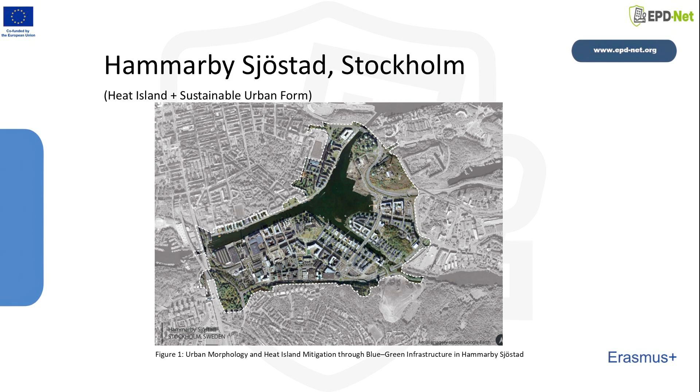The incorporation of green areas and water management systems serves to reduce surface temperatures and enhance ecological connectivity across the district. These morphological elements not only improve environmental quality but also bolster the resilience of the city in the face of climatic challenges, demonstrating a holistic approach to urban planning and climate adaptation.

Green buffer zones, rain gardens, and permeable surfaces are integrated along the street sections, enabling stormwater to be collected, filtered, and gradually infiltrated into the blue-green infrastructure network rather than being rapidly drained through conventional systems. Tree-lined streets and vegetated edges provide shading and evapotranspiration, which significantly lowers surface and ambient temperatures during warm periods and mitigates urban heat stress.

The pedestrian-oriented design not only enhances thermal comfort but also supports social interaction and everyday usability of public space. Through these spatial strategies, street sections function simultaneously as mobility corridors, microclimate regulators, and ecological systems, demonstrating how climate-responsive street design can strengthen urban resilience while improving environmental quality and livability.

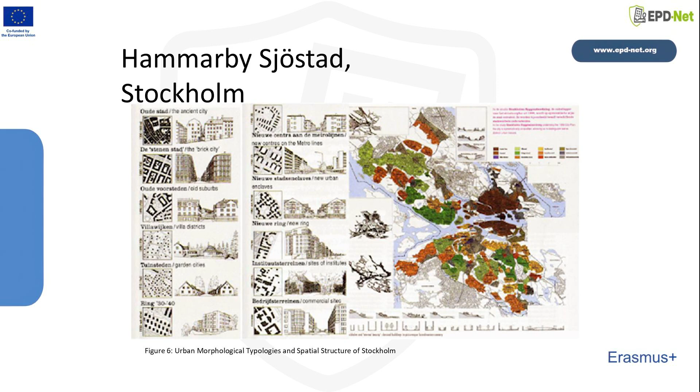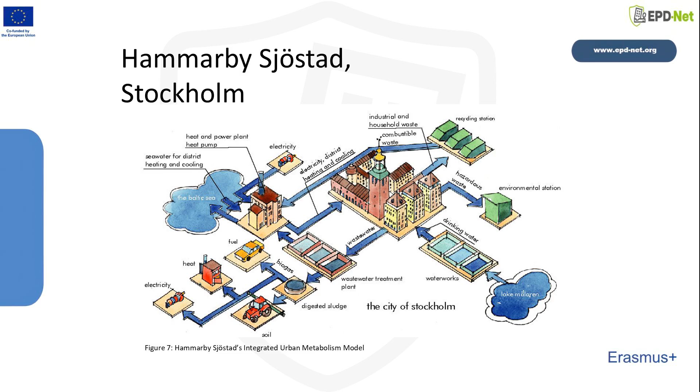This integrated approach shows that urban resilience is not achieved solely through physical form, but through the synchronization of morphological decisions with environmental infrastructure. The compact yet permeable urban structure supports efficient service distribution, while blue-green infrastructure enhances stormwater management and microclimatic regulation. By embedding ecological cycles directly into the urban fabric, Hammarby-Sjöstad exemplifies how sustainable urban form can simultaneously reduce environmental impacts, enhance climate adaptation capacity, and improve long-term urban resilience.

Medellín is located in a narrow valley surrounded by steep slopes, resulting in an urban morphology that is strongly shaped by topography. The concentration of settlements on hillsides increases exposure to landslides, erosion, and rainfall-related risks. In response, the city has developed a resilience-oriented urban form that integrates green corridors, topography-adaptive mobility systems, and slope stabilization strategies. Through the Green Corridors Program, 2016 to 2019, urban streets, riverbanks, hillside paths, and public transport axes were connected via 30 linear ecological spines, forming a continuous environmental network across the city.

These corridors aim to reduce urban heat stress, manage stormwater more effectively, and enhance soil stability on slopes. By aligning urban development with natural landform constraints rather than overriding them, Medellín demonstrates how topography-responsive planning can transform environmental vulnerability into a structural component of urban resilience and climate adaptation.

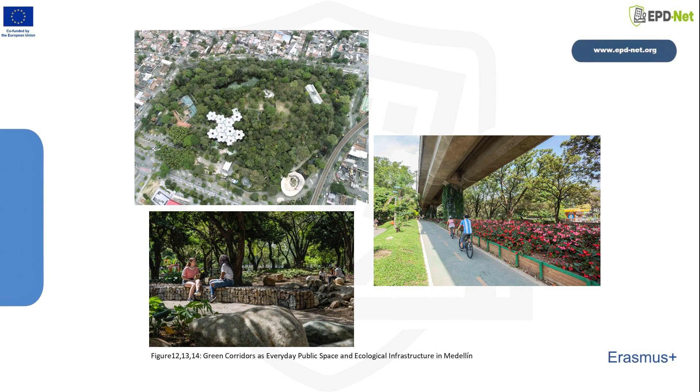This integrated approach demonstrates that ecological infrastructure in Medellin functions not only as an environmental enhancement, but also as a strategic urban tool for disaster risk reduction and climate adaptation.

The Tokyo case demonstrates how open space morphology was strategically reconfigured to address earthquake and fire risks within an extremely dense urban fabric. Following the 1923 Kanto earthquake, large-scale parks and wide boulevards were deliberately planned as firebreak corridors to prevent the rapid spread of post-earthquake fires.

In areas characterized by narrow streets and dense wooden housing, the urban fabric was restructured through the introduction of linear open spaces that fragmented high-risk zones and improved emergency access. These open areas also functioned as evacuation and assembly spaces, providing safe gathering points during disasters.

Importantly, the system was conceived as a connected open space network, linking parks, corridors, and public spaces into a continuous morphological structure rather than isolated elements. This planning approach marked a turning point in Tokyo's urban reconstruction, establishing open space not only as a social amenity but as a critical component of disaster-resilient urban form.

As another case, the Copenhagen Cloudburst Management Plan demonstrates how urban morphology can be strategically reconfigured as a flood-adaptive spatial system in response to increasing pluvial flood risks. Rather than treating stormwater management as a purely technical infrastructure issue, the plan reframes the urban fabric itself as an active component of water governance.

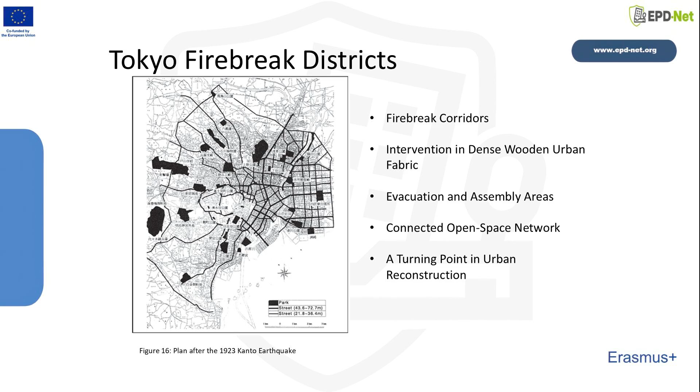While these spaces operate as conventional public realms under normal conditions, they temporarily assume the role of blue corridors during cloudburst events. This layered functionality exemplifies a robust form of morphological adaptation, in which everyday urban life and flood-resilient infrastructure are integrated within a single spatial framework.

Copenhagen Cloudburst Management Plan demonstrates how urban morphology can be strategically redesigned to manage extreme rainfall events. Rather than treating flooding as a purely technical problem, the plan integrates streets, parks, and open spaces into a connected water management system. Street sections are reshaped to guide excess rainwater safely through the city, while low-lying parks and green corridors function as temporary retention and storage areas during cloudburst events.

Permeable surfaces, biofiltration elements, and controlled surface gradients increase infiltration and delay runoff. Under normal conditions, these spaces operate as everyday public realms. During heavy rainfall, they transform into functional flood infrastructure. This approach highlights a holistic, morphology-based adaptation strategy where urban form actively contributes to climate resilience.

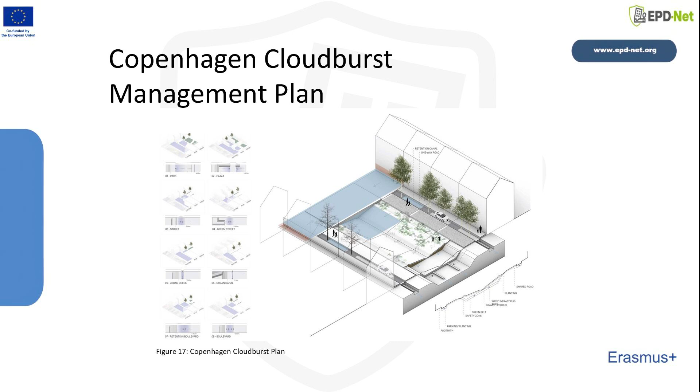Copenhagen Cloudburst Management Plan represents a resilient urban design approach developed to address flash floods caused by intense rainfall events. Instead of relying solely on underground drainage infrastructure, the plan restructures urban morphology to manage water on the surface. Streets, parks, and open spaces are redesigned to function as controlled flow paths and temporary retention areas during extreme rain events. Under normal conditions, these spaces operate as everyday public realms. During cloudbursts, they safely convey and store excess stormwater.

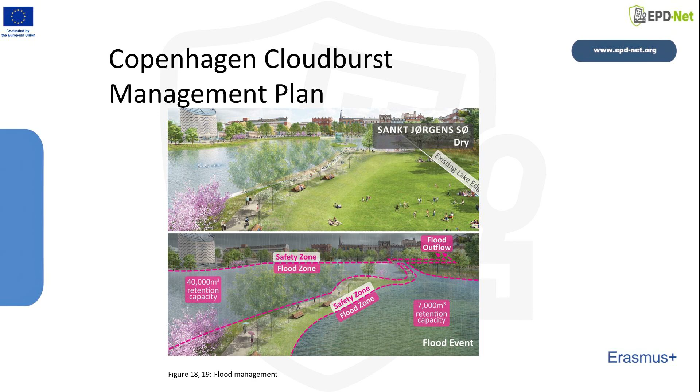This integrated system distributes water loads across the urban fabric, reduces pressure on drainage networks, and minimizes flood damage. The Copenhagen case demonstrates how urban form itself can act as a climate-adaptive infrastructure, enhancing resilience without compromising daily urban life.

Copenhagen Cloudburst Management Plan demonstrates how urban morphology can actively function as a flood-responsive system under extreme rainfall conditions. In this approach, street sections are reconfigured to guide stormwater along predefined flood routes rather than resisting it. Variations in street width, elevation differences, curb design, and surface materials are carefully calibrated to control water flow direction and speed. During normal conditions, these streets operate as everyday public spaces.

During cloudburst events, they temporarily transform into safe water corridors. Permeable surfaces, low-lying green areas, and blue-green infrastructure elements are integrated to slow, store, and redirect excess water. This model illustrates how urban form itself can become a proactive risk reduction tool, enhancing resilience while maintaining daily urban functionality.

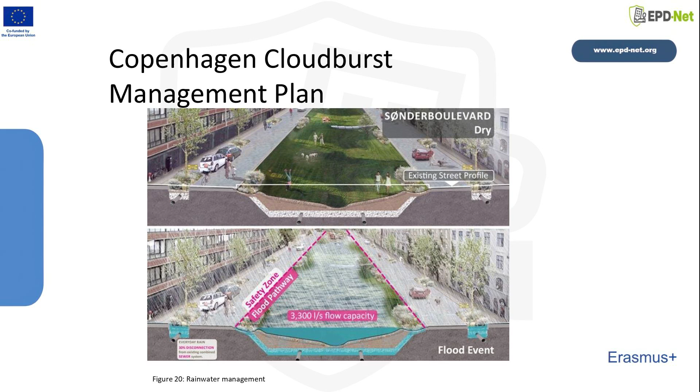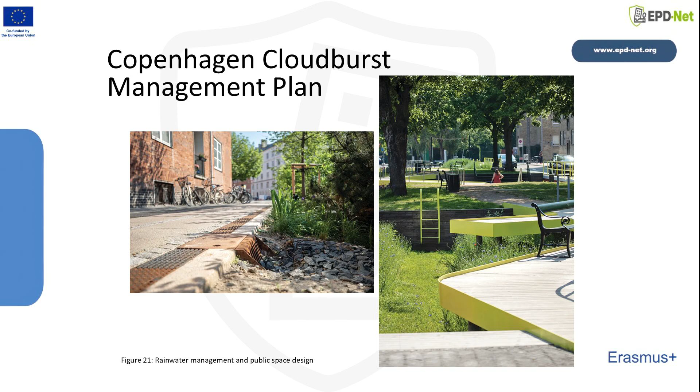This example illustrates how rainwater management is integrated with urban space design within the Copenhagen Cloudburst Management Plan. Street sections and public spaces are reconfigured to guide and temporarily store stormwater during extreme rainfall events. Under normal conditions, these areas function as everyday public spaces, while during cloudburst events they transform into safe water corridors, demonstrating how urban morphology can operate as an effective risk reduction tool. By combining blue-green infrastructure with adaptive street design, the plan enhances urban resilience while preserving the usability and quality of public space.

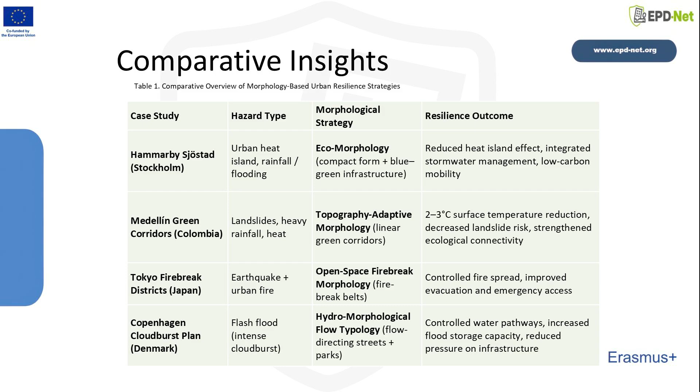As illustrated in the table, each case addresses a distinct hazard context by mobilizing urban morphology as a key resilience mechanism. Hammarby-Sjöstad integrates compact urban form with blue-green infrastructure to reduce heat stress and manage flooding. Medellin employs topography-adaptive green corridors to mitigate landslide risk and improve microclimatic conditions. Tokyo utilizes open-space firebreak morphology to control post-earthquake fire spread, while Copenhagen restructures streets and parks as flow-directing systems to manage cloudburst-induced flooding. Collectively, these cases demonstrate the critical role of urban form in hazard mitigation and adaptive urban resilience.

This presentation highlights how urban morphology plays a critical role in shaping cities' exposure and resilience to multiple hazards, including heatwaves, flooding, landslides, and post-earthquake fires. The case studies demonstrate that spatial strategies such as blue-green infrastructure, topography-adaptive corridors, firebreak open spaces, and flow-directing street networks function as effective risk mitigation mechanisms. Overall, the examples emphasize that strategic spatial planning significantly enhances urban adaptive capacity in the context of escalating climate and disaster risks.